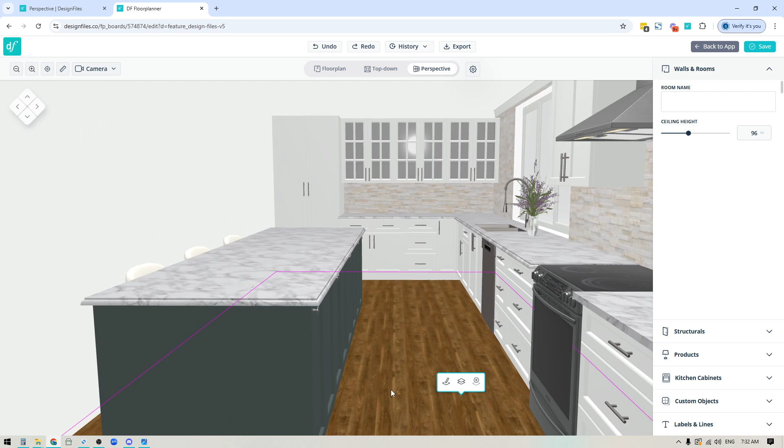I'm going to use this design as my example. Over on this far wall, I've already got all my cabinets in place. So what I need to do now is build out a bulkhead on top of these cabinets, and then wrap crown molding around that. Before I create that bulkhead, I need to understand a few key measurements.

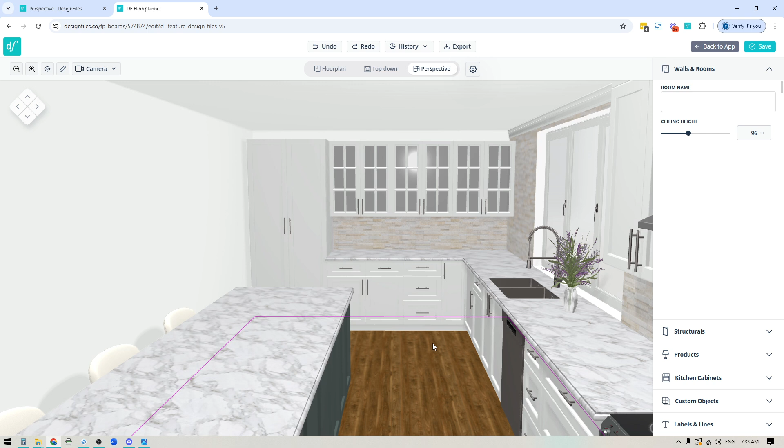If I click on the floor, I can see that my ceiling height is 96 inches. Now that I know the ceiling height, the next thing I need to know is the placement for these cabinets. So I'll click on one of these cabinets, and I can see it's currently sitting at 54 inches from the floor, and it's also 36 inches high.

54 plus 36 equals 90. So that means my bulkhead is going to start at 90 inches from the floor and go all the way to the ceiling, so it's going to be a total of 6 inches high. Now, the other thing I need to know is the width of these three cabinets together. Each of these cabinets is 30 inches, which means my bulkhead is going to have to be 90 inches wide, 6 inches high, and these cabinets are 12 inches deep.

So my bulkhead has to be at least that deep, and honestly it's probably going to have to account for an extra inch for the thickness of the doors. So I'll probably make it 13 inches deep.

Now, the other thing I have to do here is this bulkhead is going to be slightly different because this cabinet is 24 inches deep. So I'll have a secondary bulkhead for this one. Again, it's going to be 6 inches high, 36 inches wide, and because I'm dealing with a 24-inch deep cabinet, I'll do at least the 24, and I'll probably end up making it 25 inches deep to account for the extra inch of the door.

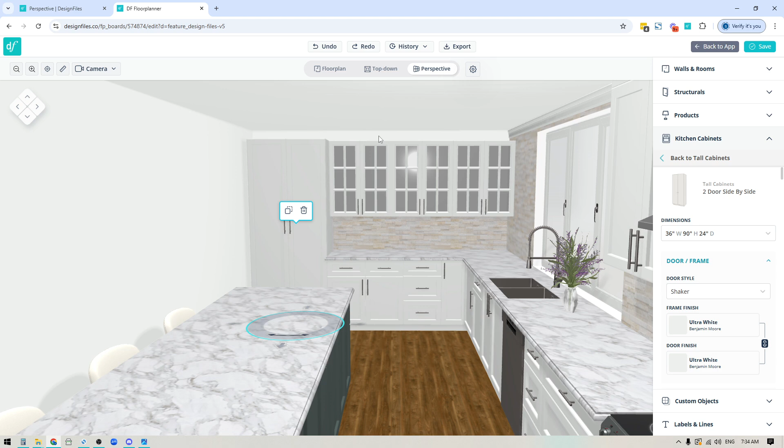So now that we know all this, I'm going to click into the actual wall here. Just click anywhere on the wall, and then click the edit icon. That's going to bring you into the wall editor, and this is where we're going to start building out that bulkhead and adding the crown molding.

So what I need to do is click on the shape option over here, and I'll click on the rectangular option. I'm just going to zoom in, click on the corner of the wall here, and then move my mouse out. When I move my mouse out, I'll click to release, and I'll see that I can create this shape here.

Now I need this shape to be 90 inches wide, so I'm going to click on this side here and pull it out until it's 90 inches wide. And I'm going to click on the bottom side and bring it up until it's 6 inches in height.

Now that I've got that, I'm going to come over to the library and apply a finish to this bulkhead. In my case, I made my cabinets a white paint from Benjamin Moore, so I'll go into the paint color library, into Benjamin Moore, and instead of searching for it again, I'll just go to the recents, where I can see any finishes I've used.

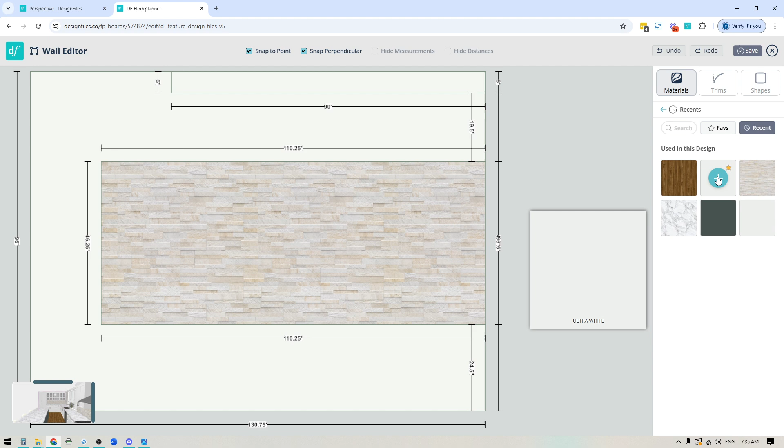So I can immediately pull in that same white color. I'll click on the shape to apply it, and then over here you'll see I can extrude this shape. I'm going to extrude it 13 inches because I've got a 12-inch cabinet, and I need to account for the extra inch for the thickness of the door. If I open this up, you'll see what that looks like. We've got this bulkhead now sitting on top of the cabinets, matching perfectly to the size of the cabinets.

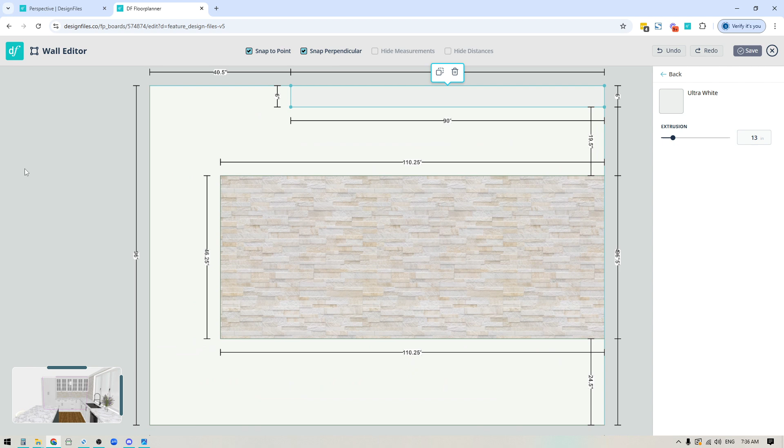I'm going to do that over here as well now. Let's close this down. We're going to move our canvas over - if you're wondering how I'm doing that, I'm just holding down the right button on my mouse and dragging left to right. I'll go back to the main library, back to shapes, back to the rectangular option. I'll click right on the corner of the other bulkhead I created, and now I'm just going to move my mouse until this is at 36 inches and 6 inches high.

Back to the paint library, back to Benjamin Moore, I'll go into recents and select that same white color. This time I'm going to make this 25 inches deep because it's a 24-inch deep cabinet, and I need to account for the extra thickness of the door.

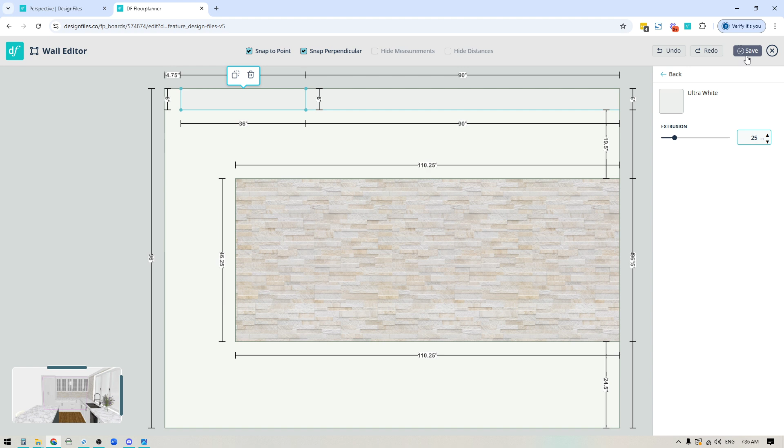So we're going to save this. Well, actually, we won't save it yet, but I'm going to open up my 3D previewer so you can see what this looks like. I'll leave this open, actually. We're going to go back to the main library.

I'm going to go into trim now, into the crown molding option. You can browse through and select any crown molding you like. I'm going to apply the crown molding to this shape, and you can see what it looks like in the 3D previewer.

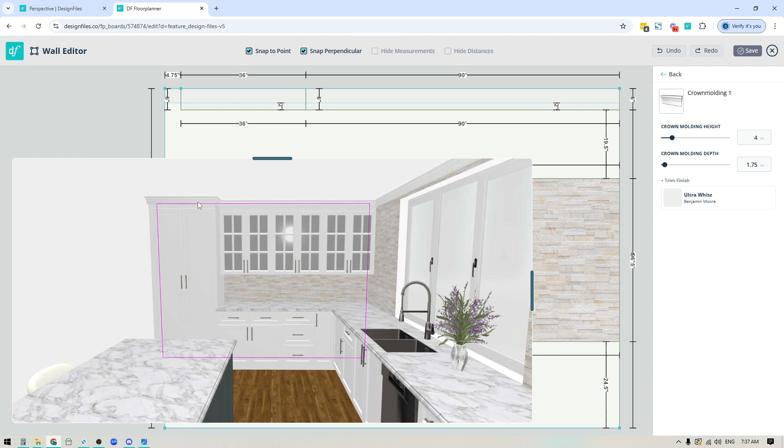Then what I need to do is apply the same paint color so it matches. I'll click to edit the trim finish right here, and then go into paint, into Benjamin Moore, back into the recents, back to the white, and it will automatically apply that color to the trim. I'll save this, and there you go, just like that.

So we've got a nice finished look in the kitchen. The cabinets have been extended up to the ceiling, we've got crown molding wrapping all the way around it, and it's giving us a really nice polished finished look. So if you want to achieve this for your own designs, just follow the steps I've laid out within this video.